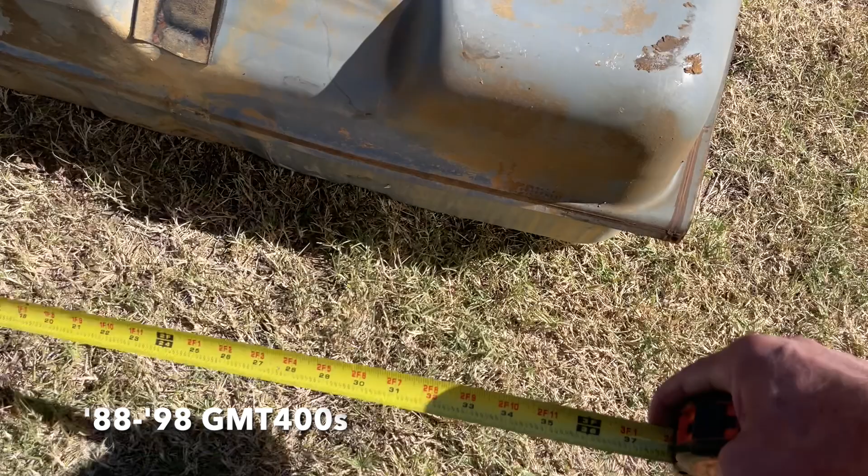So thanks for watching. Here's a fun fact for you: if your fuel tank measures about 48 and a half inches here, it's a 25-gallon tank. If it measures out to 60 inches, you've got yourself a 34-gallon tank.

It has been 2 whole days since we dropped that transmission off at Wayne's shop. There are some vendors that can't put a t-shirt in a bag and put it in the mail in the amount of time that Wayne can overhaul a transmission. I've always heard with goods and services you can pick 2 out of good, fast, and cheap. As we've established, the transmission was certainly done fast, but according to this invoice, it was not done cheap.

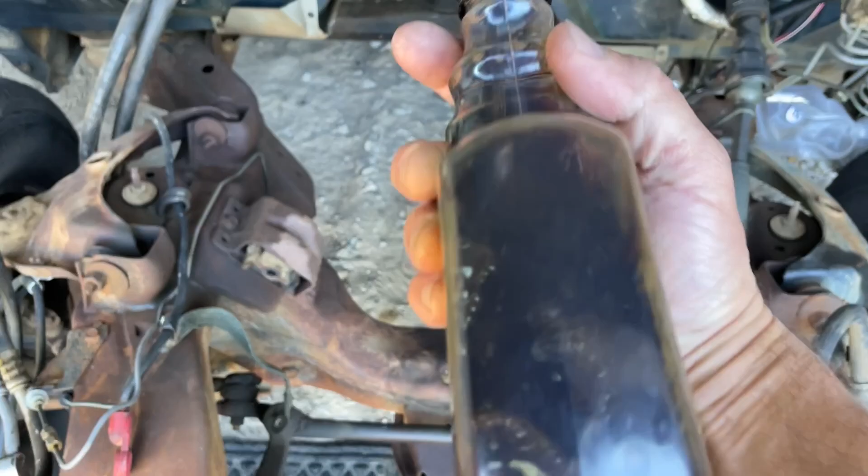Before we load this thing and take it to the car wash, I'm gonna hose it down with this B52 stuff. I found it at the local parts store. You can buy it in a gallon and in this spray. It's what I degreased that engine with, and it worked really, really well. This video is not sponsored by B52, but it could be.

I'll tell you right now, a winch with a trailer on it is so freaking clutch. You know what I'm talking about.

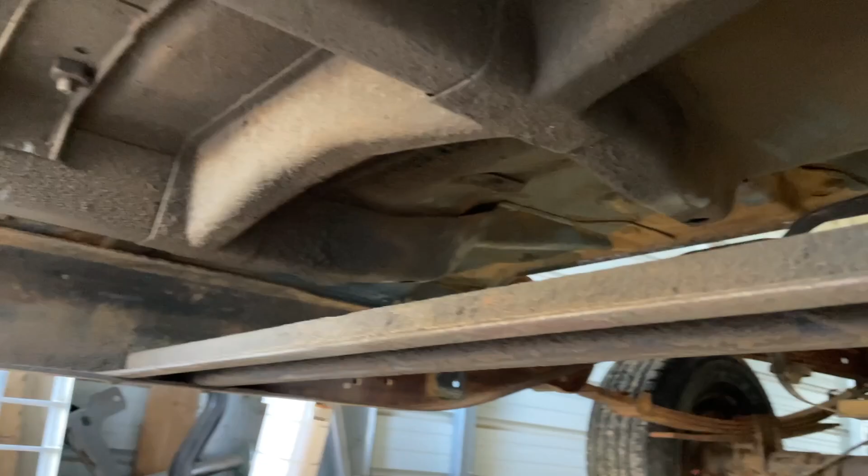Man, I'll tell you what, my poor little sandblaster would not touch this goop under this body of this cab. I don't know if the sand I've got in there is too coarse, or I just don't have the air compressor for it, or exactly what. It did kind of help with some of this sheet metal, like the stamped steel engine mounts - it would cut that stuff off a little bit, but it would eat an entire tank of air trying to get that done. So for the bottom side, since that's like 35 years of goop built up, just hear me out,

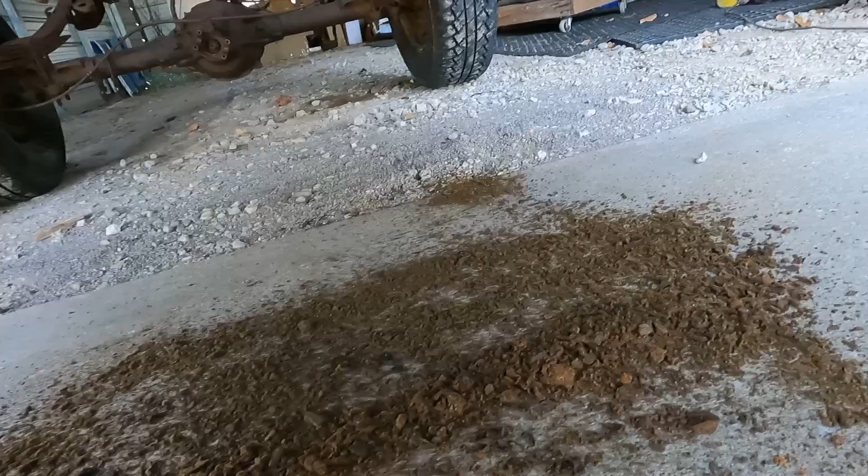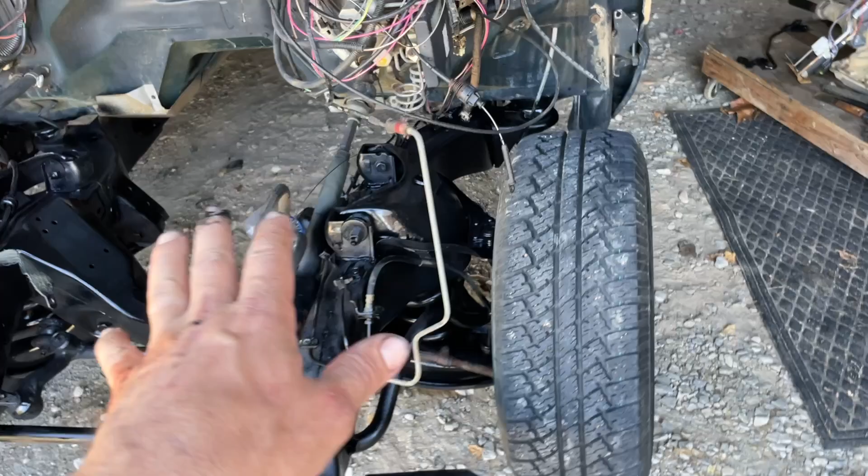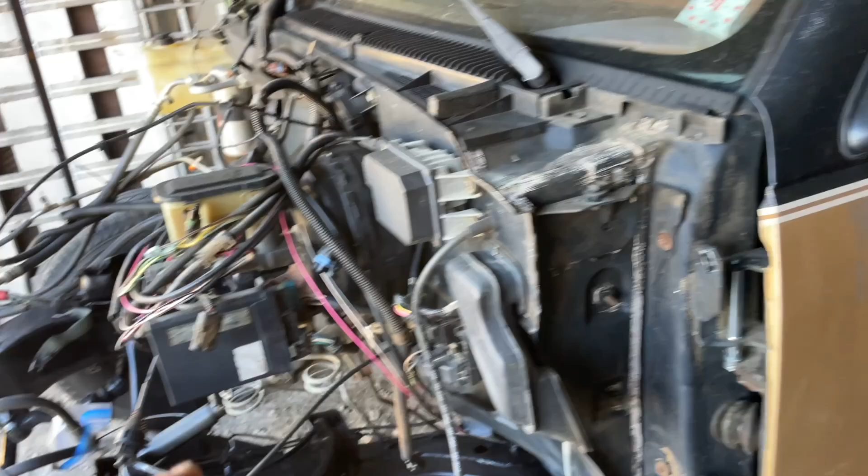All right, I'm going to admit this isn't exactly some of my best work, but I've really enjoyed working on this truck with the intention of it being a driver, and it's going to be mine forever, so I don't have to worry about anyone picking it apart if they're buying it. Normally if I build one to sell, I want to strip it all the way down, do a really good job, and make it super nice. Whereas this one, you know what? It's good enough. Mechanically, it's going to be rock solid, but some of this cosmetic stuff I don't mind so much. I don't want to be scared to put this thing on the highway, drive to Houston, to Lone Star Throwdown, or drive to Nashville for C10 Nationals, or make the trip to Utah for C10 Nationals one year. Wouldn't bother me a bit.

Frame prep work is done, at least for the front end and under the cab. We'll deal with this section back here later.

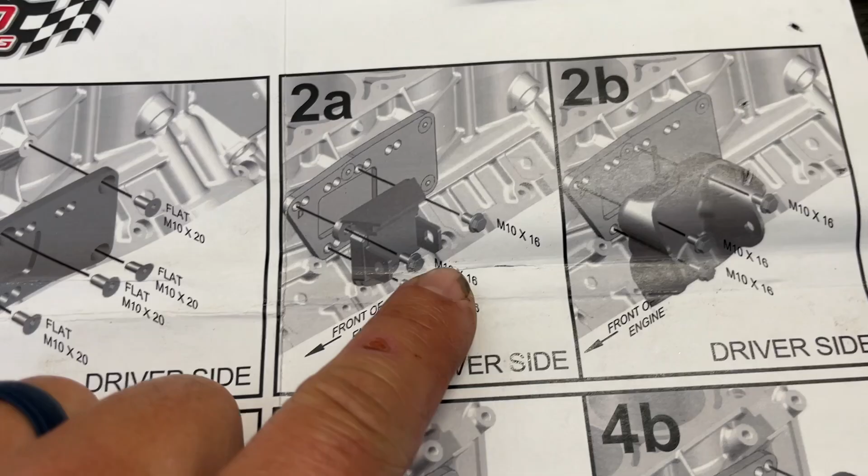So I thought we were ready to get started on the motor mounts, which, by the way, I bought all this stuff from 918 Motorsports locally. This is the Speed Engineering part number - these plates bolt to your LS, and then they allow for your small block Chevy mounts to bolt to them. As you can see, that's the clamshell style, which we have.

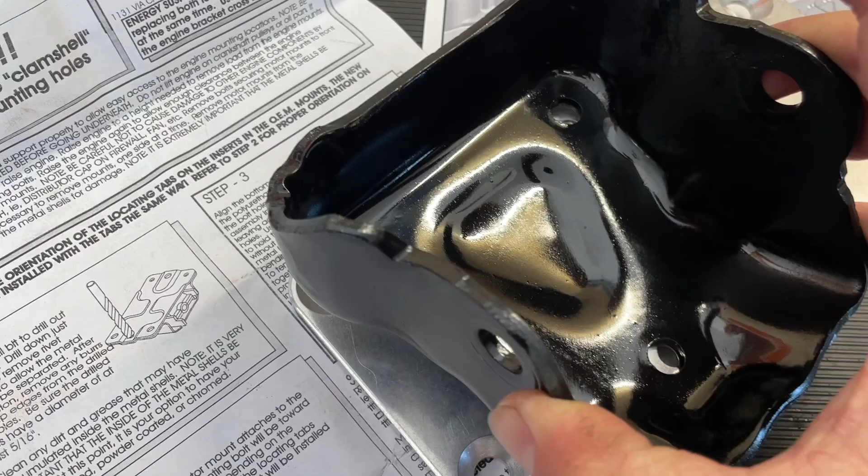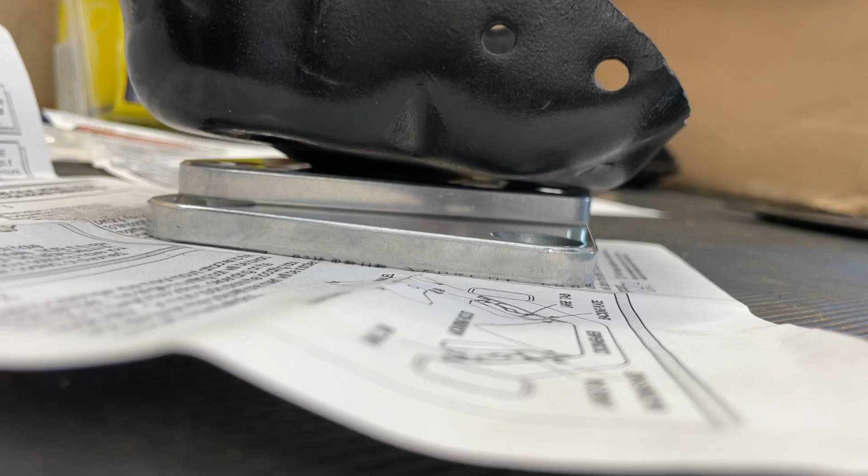The problem is I don't see an indentation there in that drawing, and you see this exists in my brackets. So I thought this relief would allow for those to sit in there. They're supposed to mount right there according to the instructions. Should sit about like so.

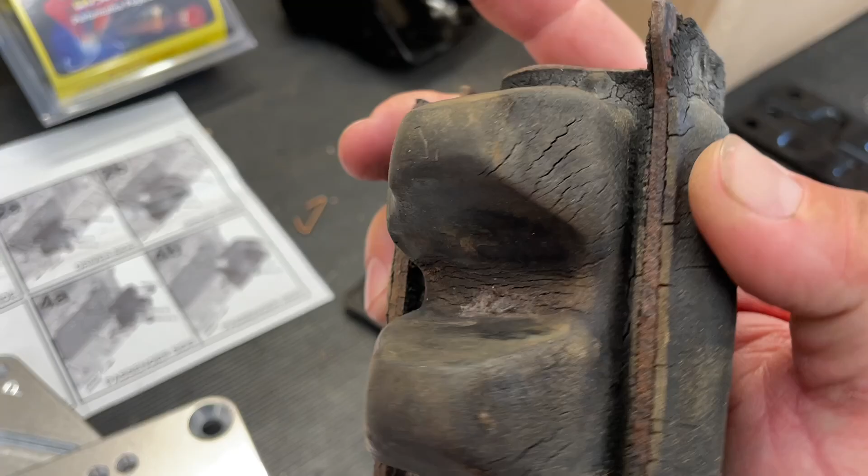But when it does that, it doesn't rest flush in the recess. Clamshell - these are just factory replacement small block Chevy urethane inserts that look like this. So yeah, they will sit in here where these used to, which are not in the best potential shape they've ever been in. And then it takes some doing to mash these down together and then bolt them to the frame.

In the meantime, we never did put the crank pulley back on our engine after we tore it down and put new gaskets and seals in it and cleaned it up pretty good. You guys remember when we tore the engine down in a video, we cleaned this up and painted it. So I'm gonna put that on. A lot of guys will use or reuse one of their factory crank bolts, which are non-reusable, but I guess it seems like I got a pile of these things in here.

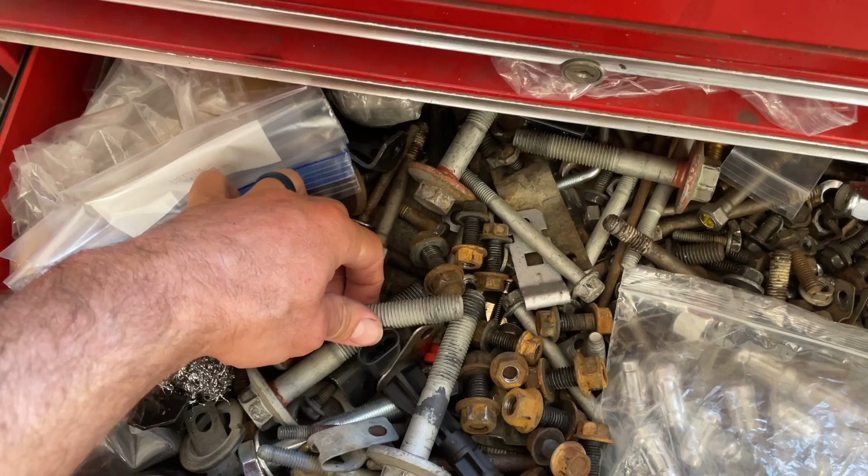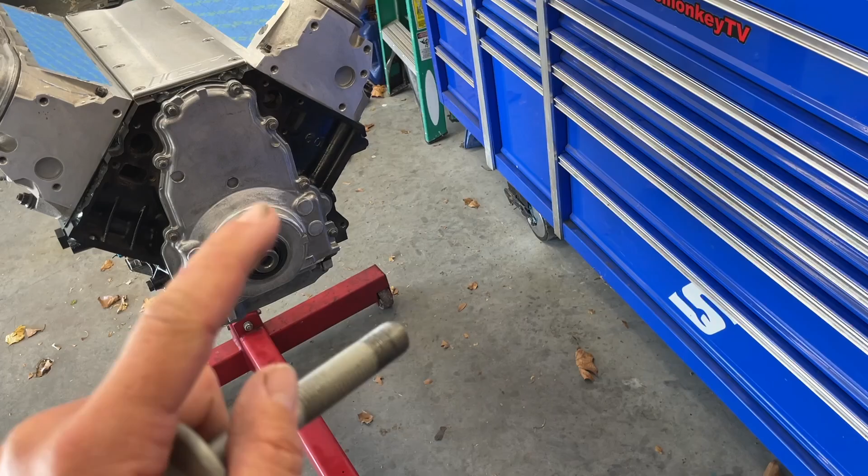Yeah, just pick one. Maybe put a little grease right there so that rubber won't change the torque, and just run that thing in with one of these old bolts, then buy a new bolt to torque it down properly, because they are one-time use torque-to-yield bolts unless you buy an ARP.

Again, from 918 Motorsports, I think this was $12 or $14 or something like that. Back when the LS motor was kind of new, we couldn't find installers that worked with this engine, but since they've been around so long now, it's not uncommon to find tool rentals available. Your local parts store probably will have something you can loan, or you can order one on Amazon because they're not that expensive.

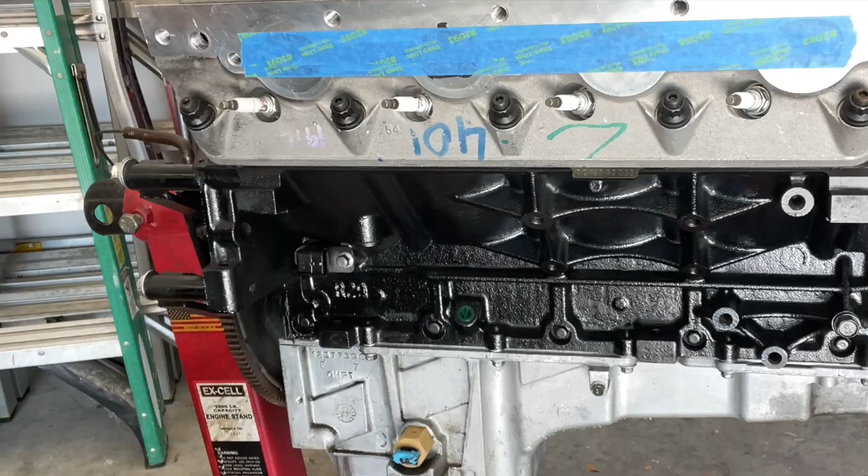Something you'll need that you won't find on Amazon is this little homemade jobby that my homeboy Doug made. Basically it's a piece of flex plate and some tubing, so you can bolt it right up against your flex plate and tighten it down. It'll keep the engine from turning when you're tightening that crank pulley.

Don't use an impact for this, kids.

Now we've got the pulley all the way flush against, I guess it'd be the oil pump in there. This is our new bolt, GM part number this. Again, you can use an ARP bolt if you like. To torque that thing, you're gonna need a torque wrench that's good up to 250 pounds. It's also helpful if you're strong as an acre of garlic, so you can get it there.

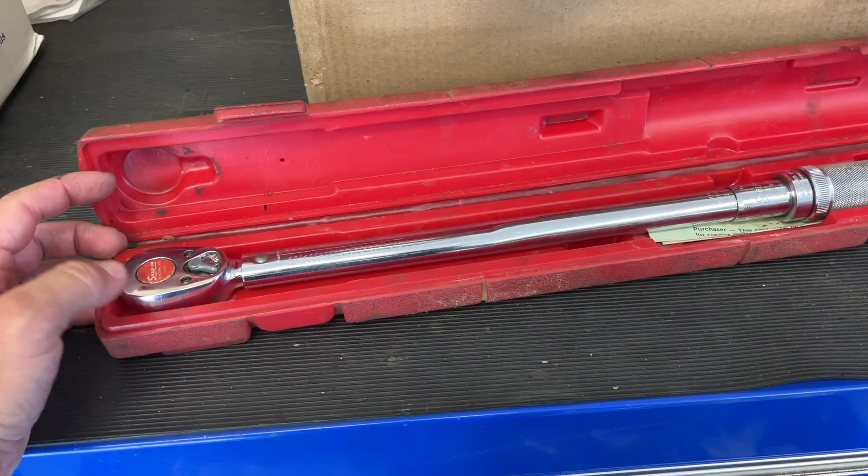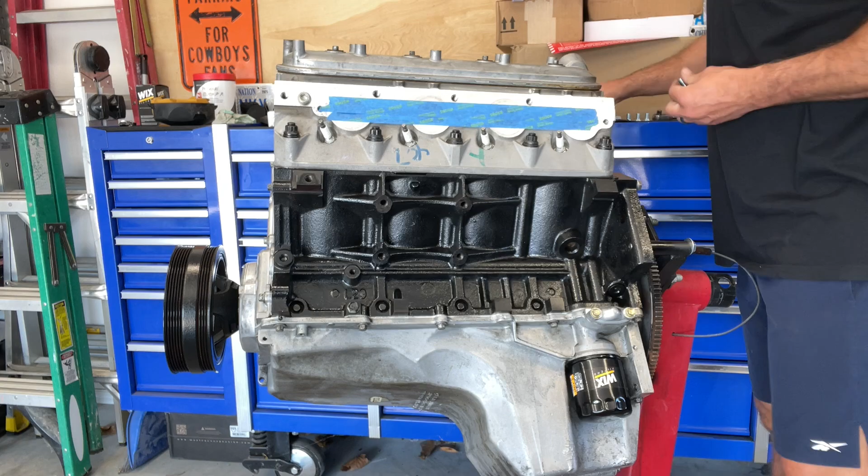All right, we're waiting for the paint to dry on those recently modified upper mounts, or cups, as some like to call them. So I'm gonna go ahead and put this adapter plate, and I like to use a little bit of thread locker. This is orange, which is supposed to be somewhere between blue and red. The blue probably be good use for this, but I can't imagine when these are going to need to come off.

Instructions don't really list it, but based on some of the things I've seen from like ICT Billet, it looks like the factory location is all the way forward on these mounts. So that's where we're going to put ours, our recently modified ones, that is. And I put blue thread locker on these.

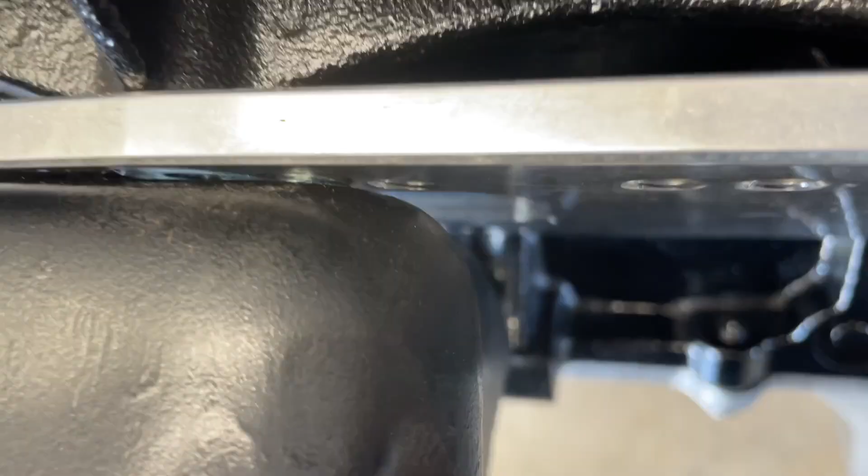Is it being aluminum? I don't want to get aggressive. And just our luck, this bolt is bottoming out on the engine block before this cup gets tight against our engine mount.

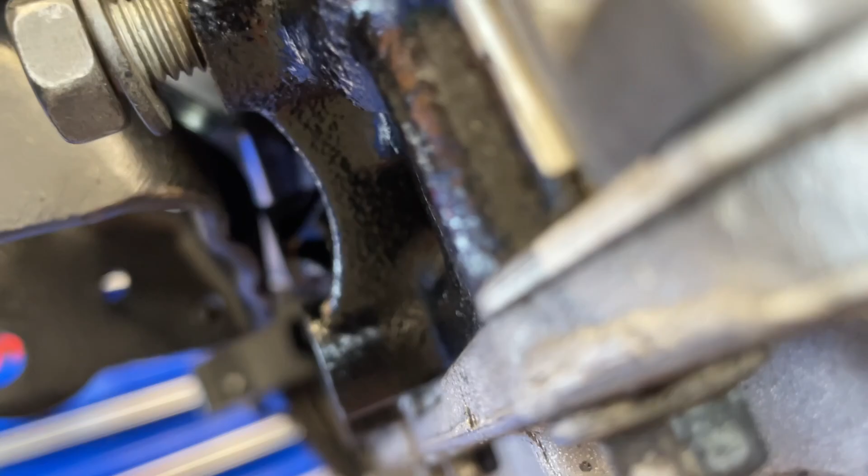Like, has nobody ever tested this kit? The issue for the passenger side is that little bung on the block for where the AC compressor mounts is making contact with our bucket here before it gets flush. So more cutting and modifying.

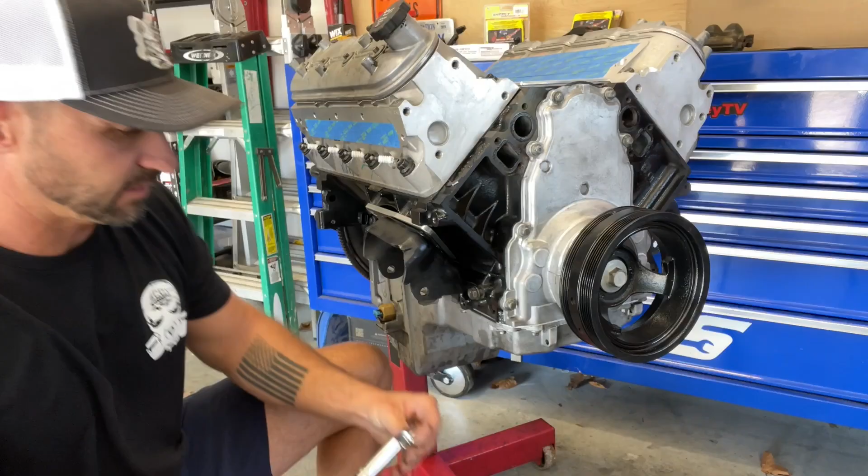After using washers on both upper rear bolts, both sides, to space it out, modifying our lower engine mount cups to get rid of that hump in them, and trimming this AC gusset on the block to clear these engine mounts, these pretty much just bolt right on.

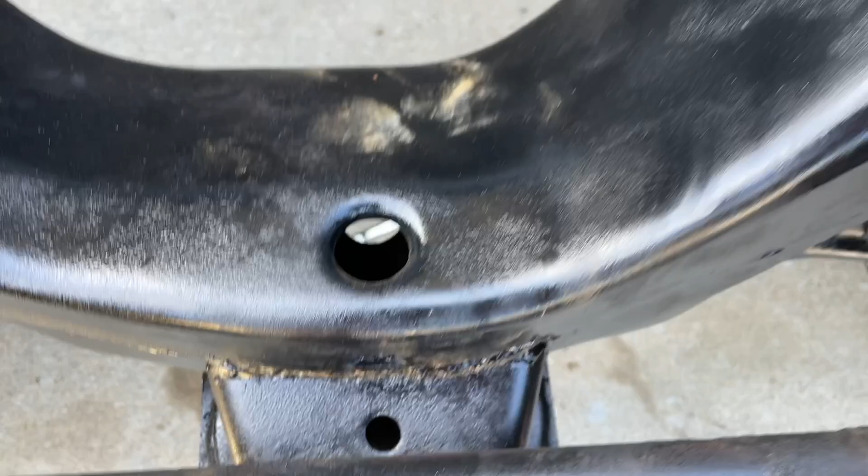If there's a worst engineering design in history, I think this would be a contender that General Motors has accomplished here. The bolts go through this, the mounts, into this factory K-member, which outside of holes like this size and that one down below, you don't have access to the nuts on the backside of these bolts unless you disassemble the suspension and pull the coil and the shock out, then reach into a smaller opening to get to them. So yeah, you got to use the buddy system on this one.

We finally reached the stage where we can pull the OBS into the main garage and start doing some of the serious technical work. Let's go over a couple of the parts that we're going to need.

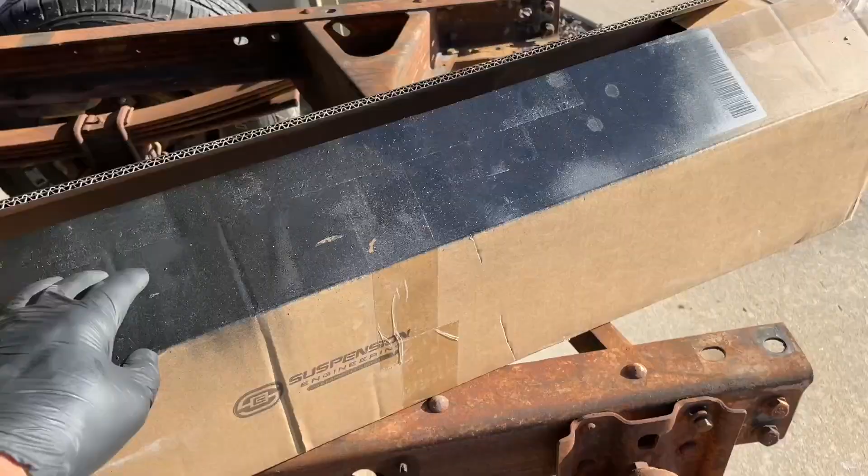This is from Speed Engineering, bought through 918 Motorsports, from their suspension division, which they conveniently call Suspension Engineering. It is their OBS transmission crossmember, and it's designed to work with their exhaust, which we have as well. Their X-pipe for these comes with this hardware. Oh, here's the part numbers - top part number is the shims and the bottom part number is the crossmember.

So I think you can get this in red or black. Their website states that you're going to need 3 of these shims to get the transmission lined up for their exhaust system, if not mistaken. And this is the hardware they send to mount the crossmember in the frame.

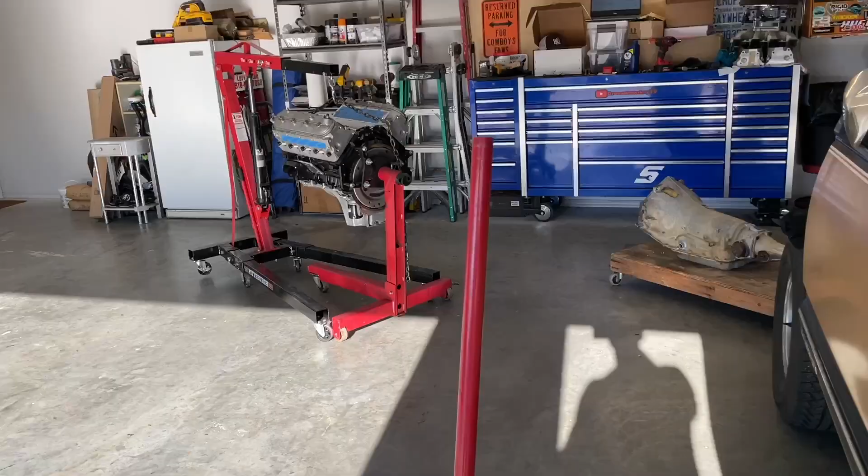We've got the engine ready with the hoist. The transmission, of course, is sitting here as well. We got a couple little things we need to do to that. This is the torque converter we're going with on this build. It's from Performance Torque Converters.

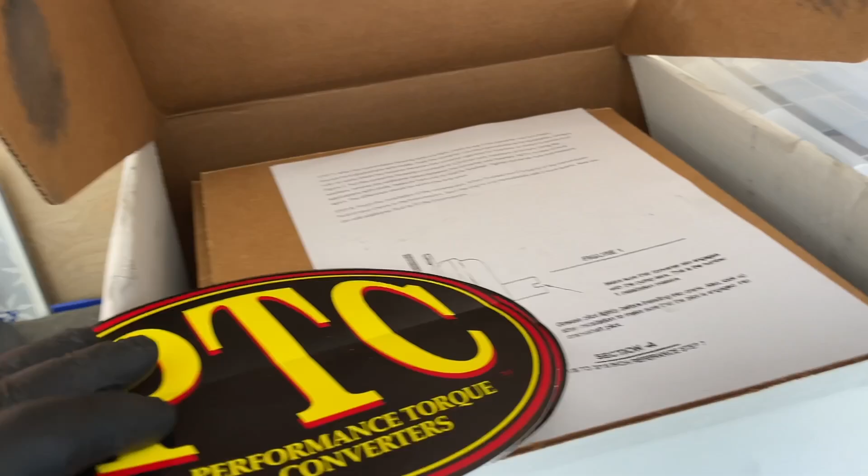I guess some of these guys used to work for TCI or something like that. I called them up, told them what the truck weighed, the cam specs, and what we were trying to accomplish with this build. They built this in like 2 or 3 days and shipped it out to us.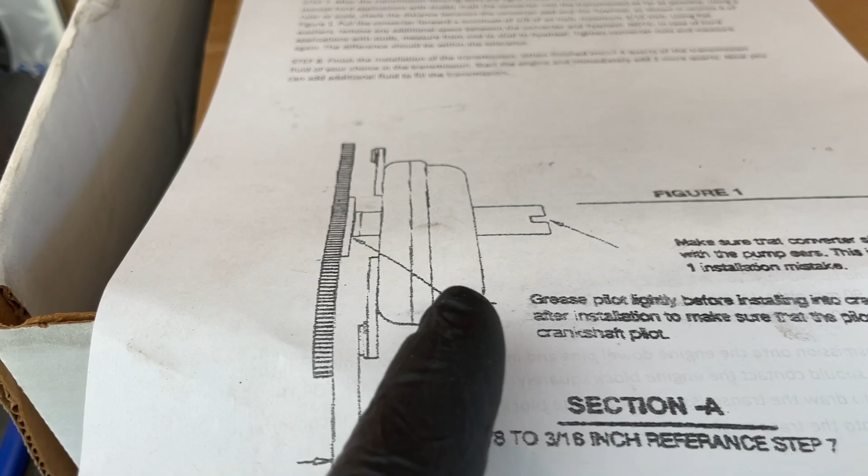There's our instructions about putting fluid in it and test fitting everything, and here's a statement about how your torque converter should be 1/8 to 3/16 away from the pump, in this direction. So you add shims between the flex plate and the torque converter to accomplish that distance, which we've done before on the channel, and we'll look into that when we go to mount this thing.

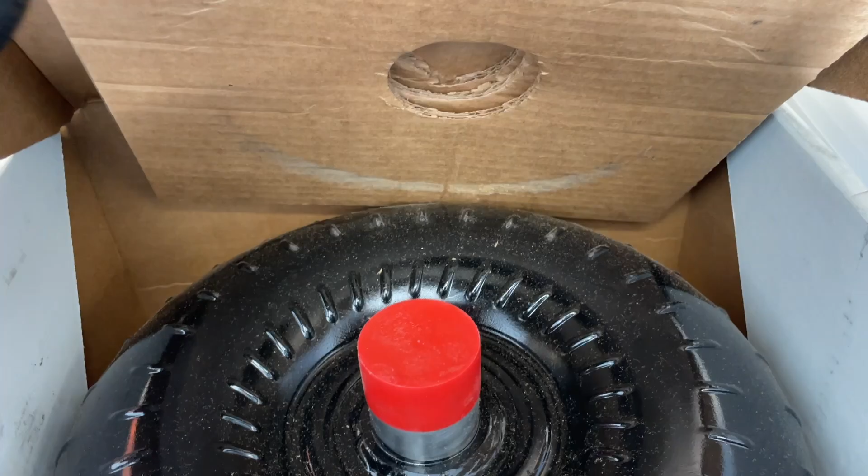Some flex plates must have smaller holes. It was sent pretty nicely packaged, and actually sent with torque converter bolts—well, two of them anyway. Oh yep, there's the third. A lot of manufacturers sell you those bolts separately, and at the price of this torque converter I was extremely happy. I don't think they gave me any kind of special deal, but it's like $300 or so plus shipping. So we'll see what happens.

I mean, it's a lockup. 2200 to 2500 stall, I think, would be just right for our application.

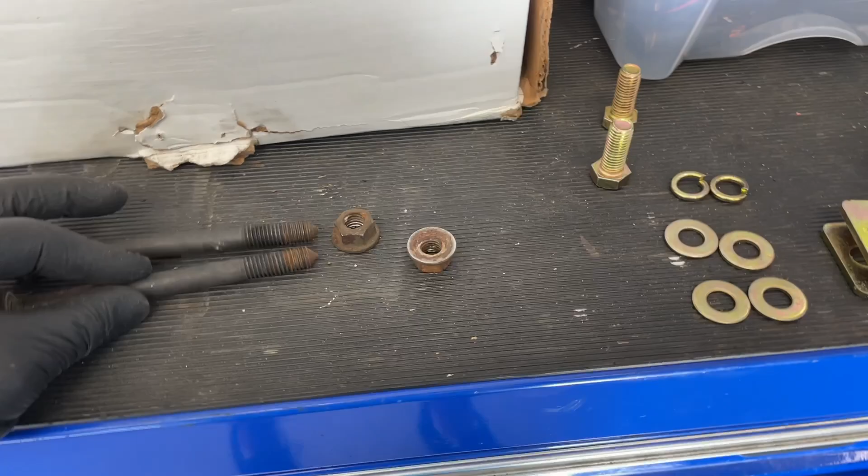When you're doing these projects by yourself, you want to make sure you have your hardware ready. Here's our engine mount bolts. These are the bolts that came with this transmission mount, also from Speed Engineering or Suspension Engineering.

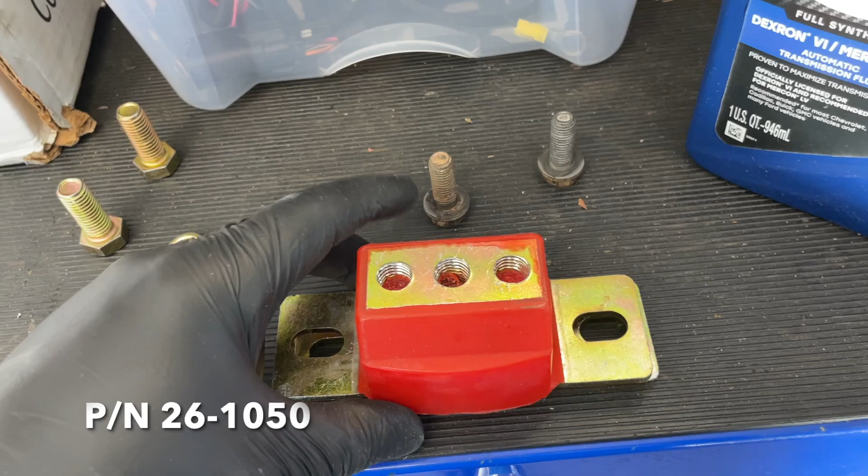It depends on which website they're calling themselves when they sell it. It comes with these washers and split lock washers, and the bolts go through the transmission cross member and through however many shims—though I don't think that's going to be long enough to go through all those shims. We'll see what happens.

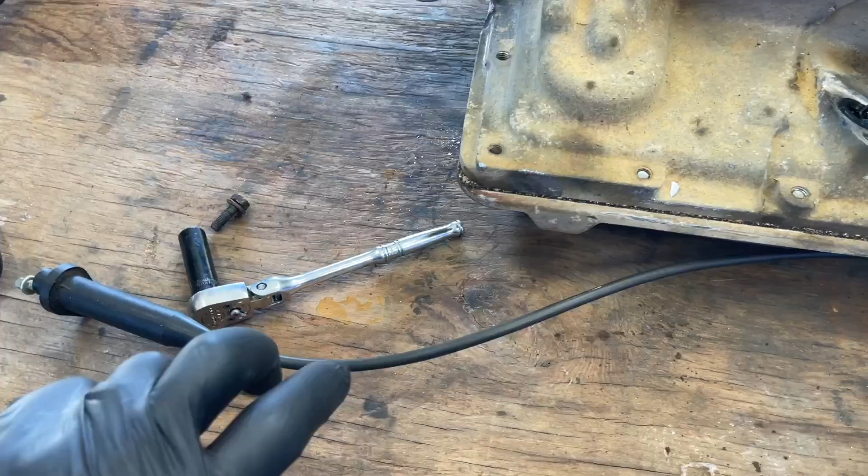I've got this set out and ready. This is our TV cable, so this is what tells the transmission when to shift based on throttle position. It's easier to go ahead and get that threaded into that little wire and bolted down out here before we have it inside the truck.

I'll probably leave out the dipstick tube for now because those things tend to get in the way when you're fighting your way into the motor, into the truck.

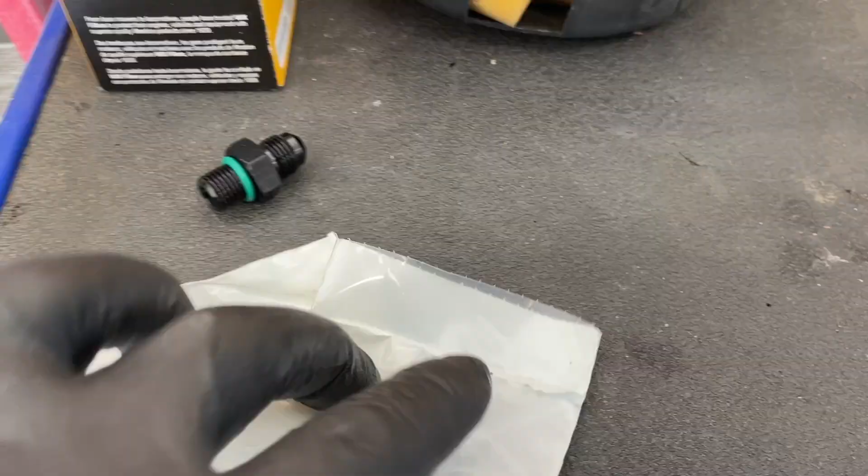These are our transmission cooler lines. What we typically get from Amazon, ICT Billet, or 918 Motorsports are O-ring fittings that adapt to— oops, wrong drawer. Yeah, here we go. I knew I had a bunch of them. There's the part number from ICT Billet.

Again, there are multiple sources you can get these from, and they'll thread into the 4L60, 4L60E, 700R4, and probably the 200R4. These are not metric, by the way—11/16. But these are 19 millimeter.

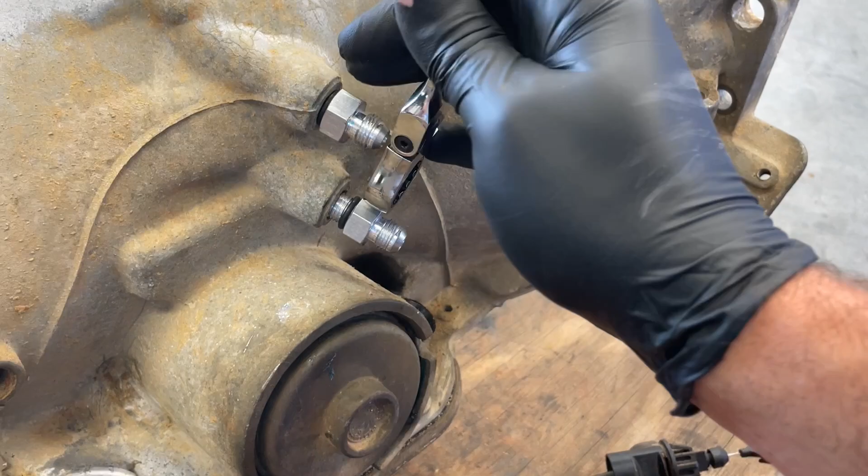You don't need these things tightened like lug nuts. It's O-ringed, so you really just need to run it in there until you compress the O-ring. And you'll notice there's a bevel there that O-ring will kind of sit in.

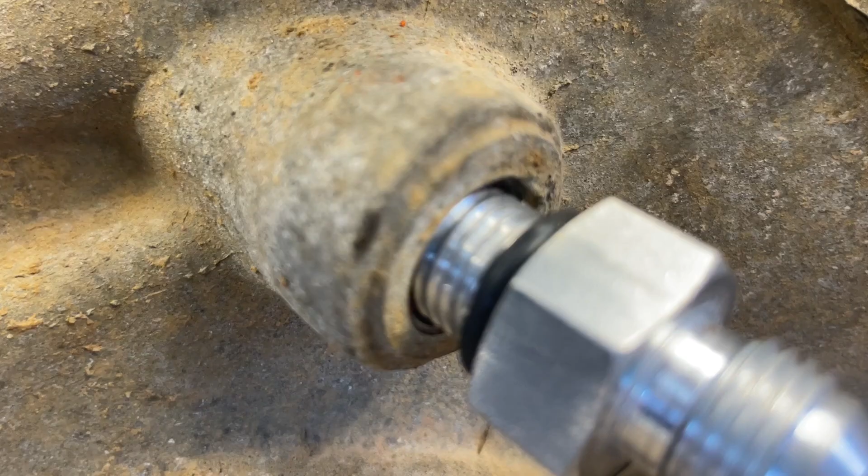Here's your pro tip for this video, and it goes for all the hardware: as you saw, we kind of had it ready. Have your hardware laid out and ready where you're gonna need it, especially when you're doing it by yourself. It'll save you a bunch of crawling in and out.

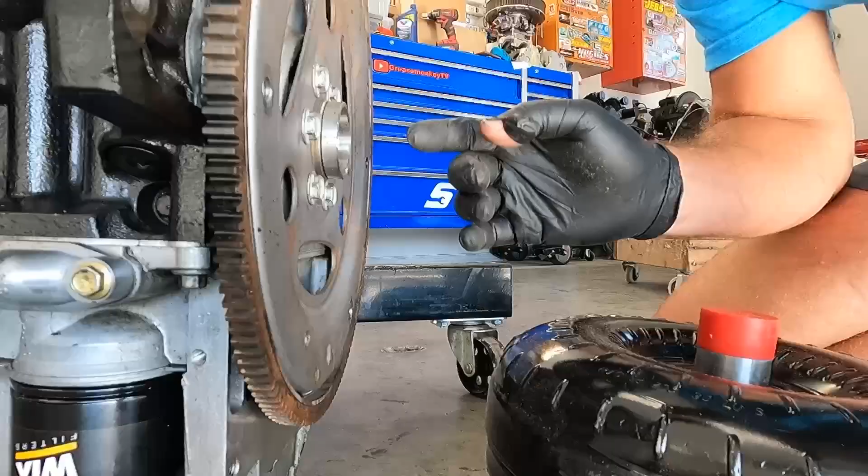When you're doing an LS swap and reusing one of the older style transmissions that did not come behind an LS generation engine, you have to have a specific flex plate like this one, and this little spacer tube. I think it has to do with the distance of the bell housing you're trying to make up here. You want to make sure this is cleaned up.

According to the instructions from PTC, this is also in there. This is cleaned up, a little bit of grease or something on it, and then check on your torque converter that there's no excessive paint or something you need to clean off, because it needs to sit in that spacer bushing, and you should be able to slide it flush up against the flex plate.

So when you're test fitting to get your distance right off of the transmission pump, you don't want that to be when you find out you've got a lot of trouble.

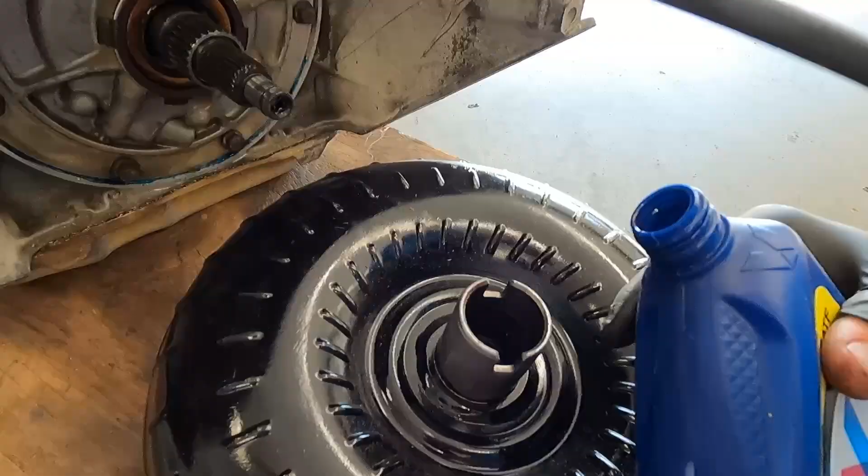Put about a quart of transmission fluid, or however much you can get, in your torque converter and slide it onto the transmission. You can really take your time doing this—these things take that transmission fluid really slowly.

And then sometimes you can turn them up—you can sort of see it start taking it in there a little easier. Then let it rest and keep an eye on it. Come back later and add a little bit more.

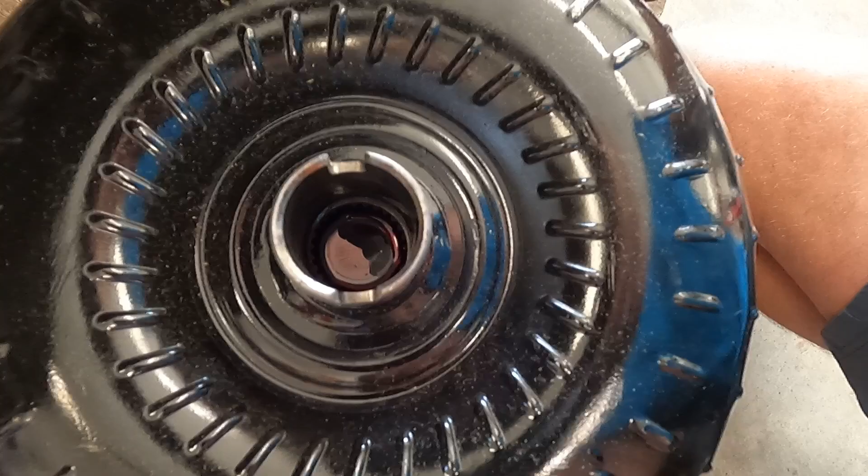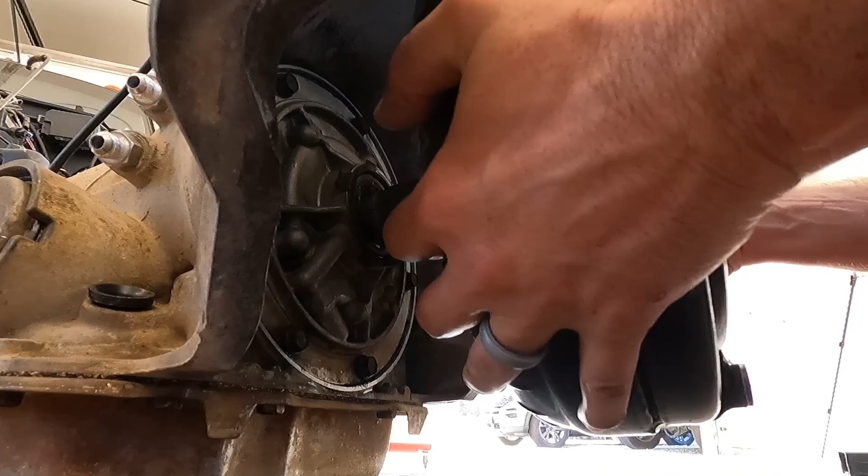All right, I put a little transmission fluid on everything. They say you can put grease on this too, but whatever, dude. I'm going to be real careful and support the weight of your torque converter so it's not resting against that O-ring seal till it gets up on some splines.

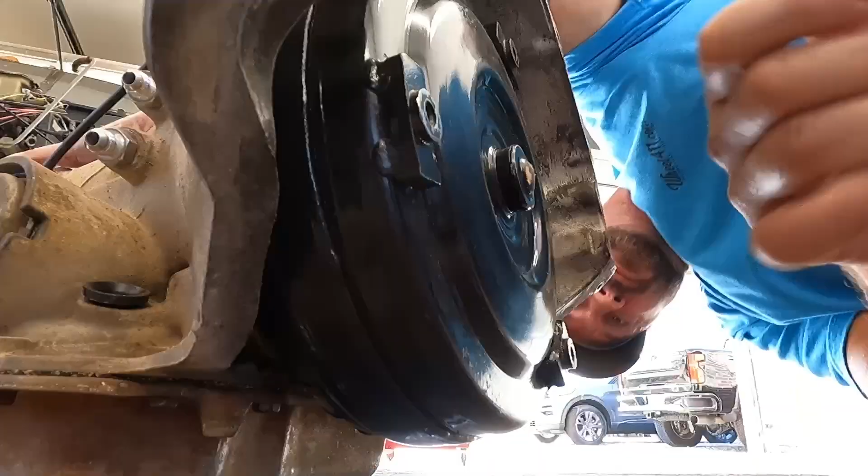Oh, somehow we still managed to pour a little bit out.

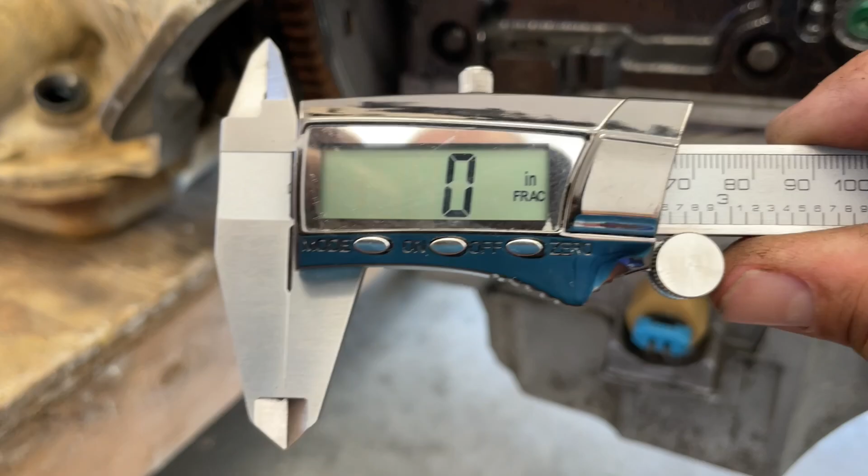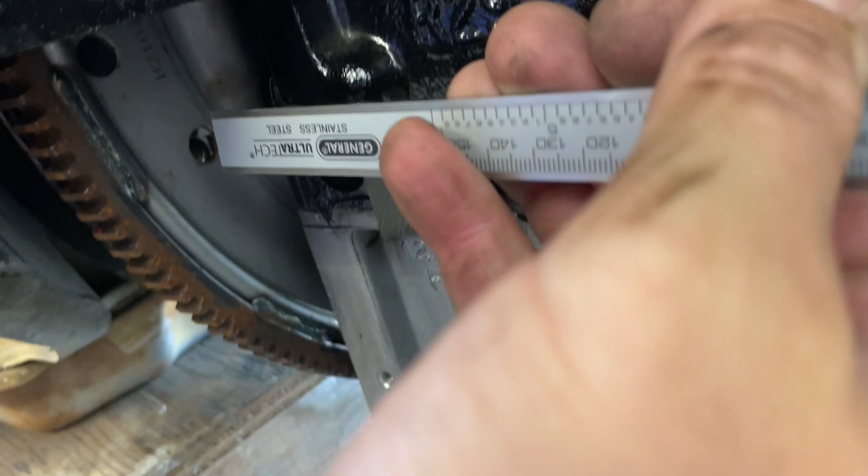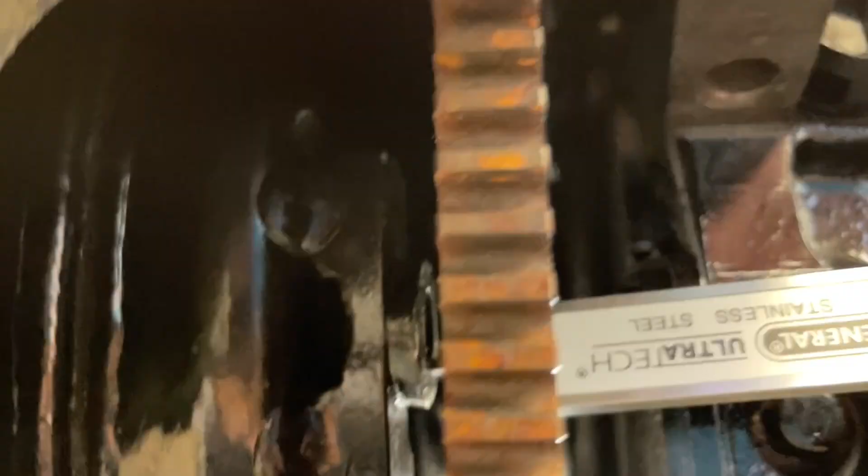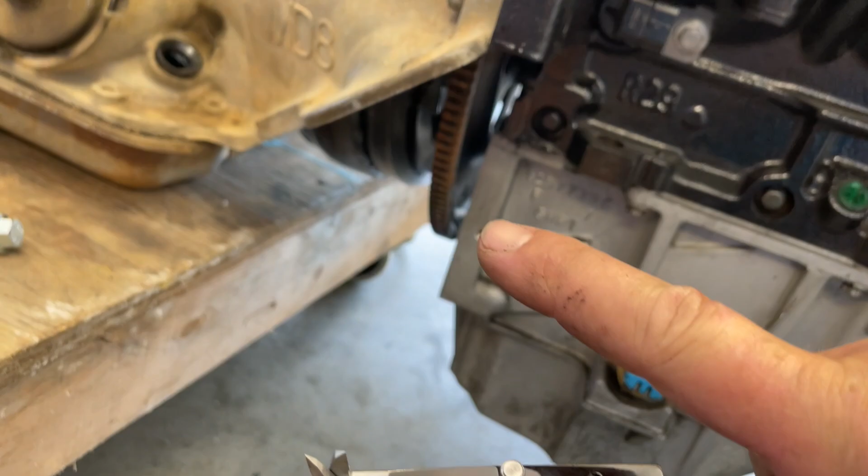It's time to do the maths. So we have our calipers set at fractions of an inch. Almost all calipers, if you open them this way, give you a reading that comes out the bottom, which is another method of measuring. I'll put the calipers against the flex plate, then extend the tab out until it makes contact with the surface of the mounting tab. So that's touching this surface, and this is touching the surface of the flex plate. It tells me we have 3/8 of an inch whenever the torque converter is all the way against the face of the transmission pump.

Now we're looking for 1/8 to 3/16. This needs to move out at least 1/8, and that will give us the maximum amount of space from the pump, but the minimum amount of washers taking up thread on our torque converter bolts.

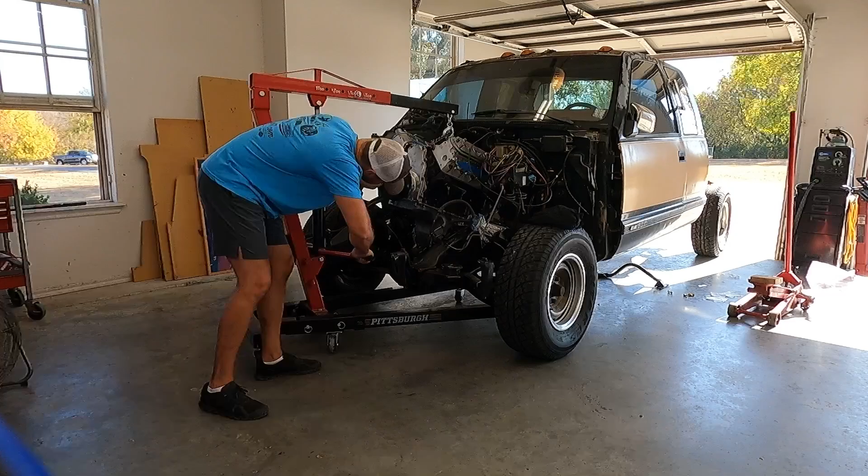Makes sense on the instructions now why they want you to put this small tab towards the top and the big one towards the bottom. I don't know if we mentioned it earlier, but the idea is this will rest on these tabs and the bolt will slide in real easy.

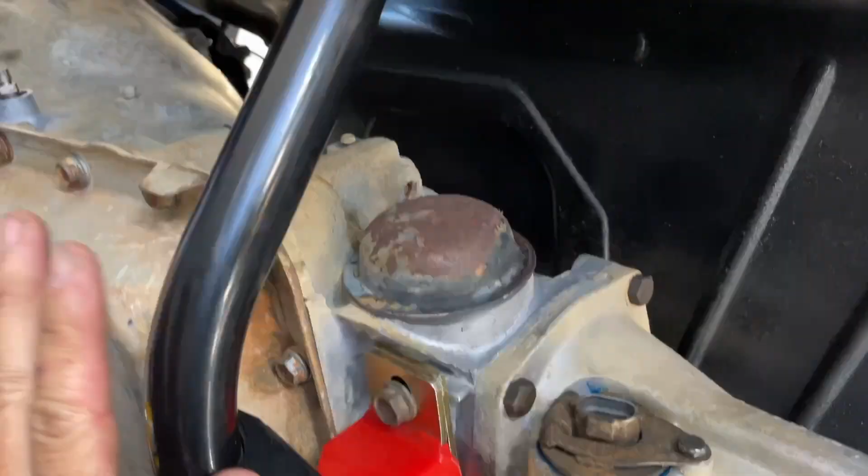This transmission cross member has no instructions. I saw pictures on their website under their exhaust system, not under the cross member, and noticed it. Of course, the arches go up, but this one makes contact with the pan before it gets far enough forward to bolt this, to run bolts in the mount.

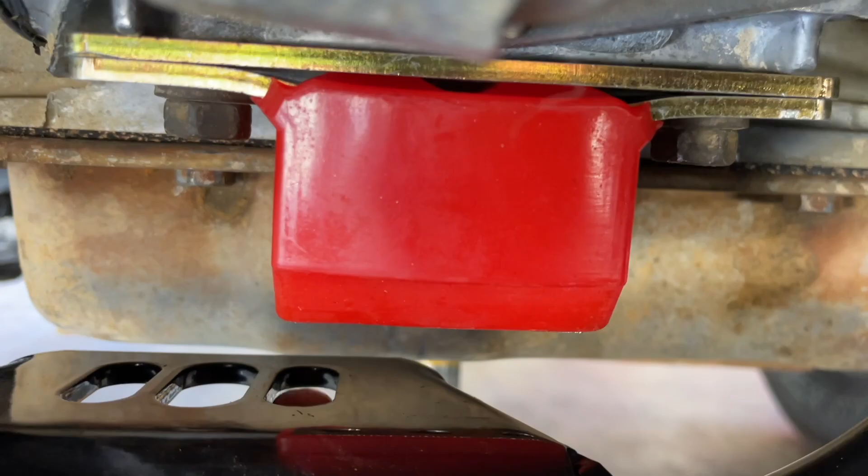When you flip these way off center, this bolt could probably line up here. I don't love the idea that only one bolt will be in that transmission to the cross member, but in all actuality, that's all that was on these from the factory.

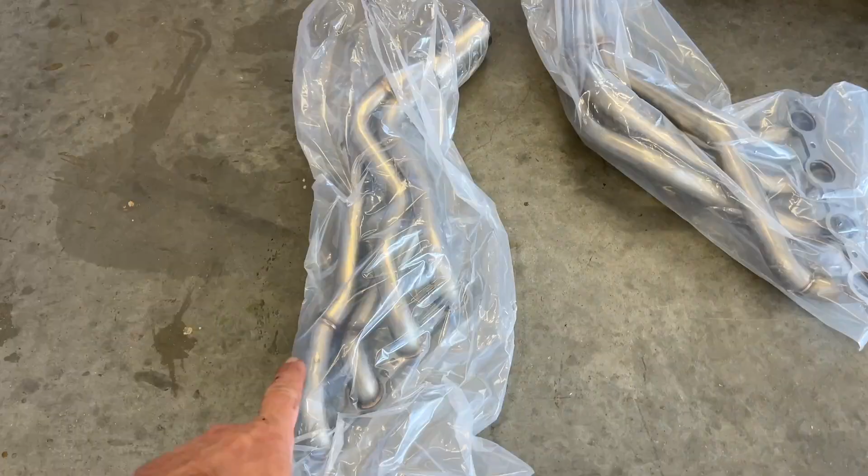These are the 1 7/8 inch stainless headers from Speed Engineering. Get a couple of these bolts ready. I'm just gonna test fit these headers on here without gaskets for now.

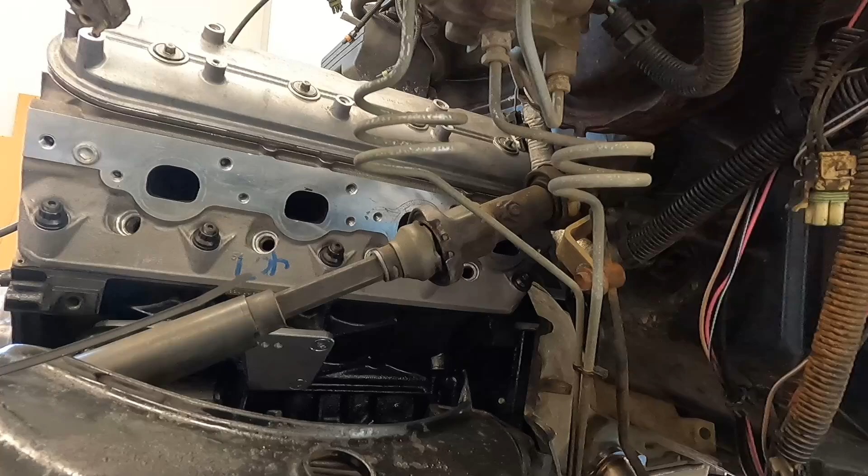And bring any bolts with me.

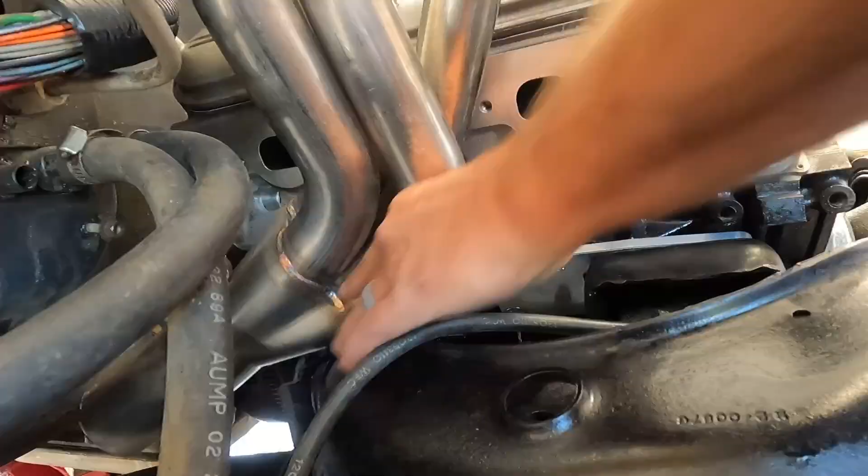I'll take the air conditioner off and fit it in there. But it looks like I'll probably end up having to cut that tab off the side of the transmission.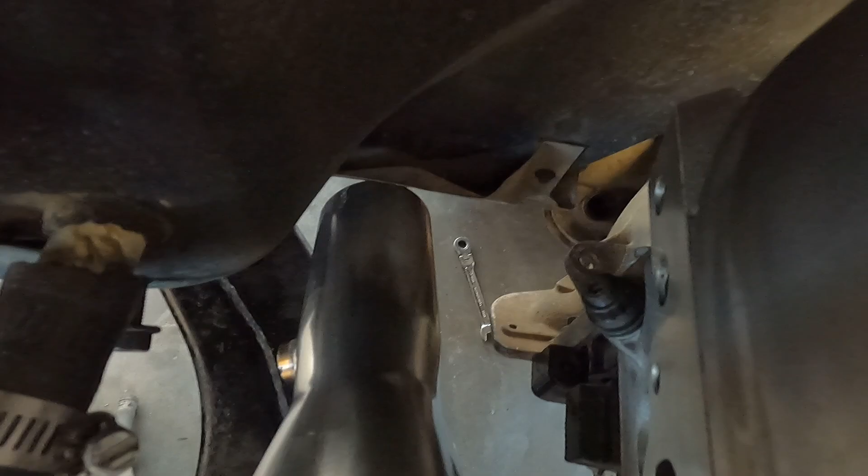This would have been way easier to cut off that transmission while I had it out here on the floor.

Stay there, buddy. Looks like the transmission's gonna have to come down in the back, maybe for this to flush up just right.

Man, it is a tight fit, which they did state that on the website.

So it's gapped at the top, which means the bottom needs to swing out, but it's making contact right here with this upper control arm mount. I'm not sure going down is going to help much.

I certainly don't like how close this brake line is. I'm going to have to massage that thing a little bit.

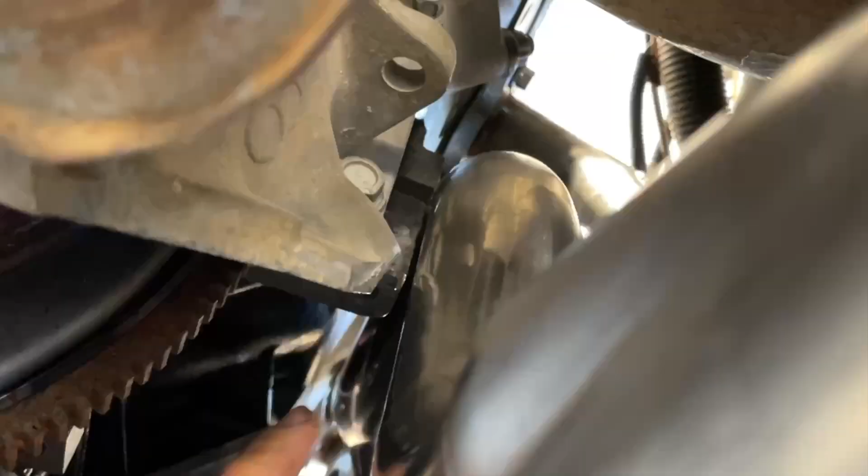There's no way these would have went in without trimming this transmission right here, because I took a full, I don't know, inch off of it for that ear.

The header is still, well, it wouldn't be touching the block if we could get it to swing out this way like it still needs to.

Here's what we ended up with for now. I've got 2 shims, and I ran the bolt in the middle hole of the mount and one hole to the right here. So technically the bolt's going right there. That should be fine. These look like we've got pretty good clearance coming back.

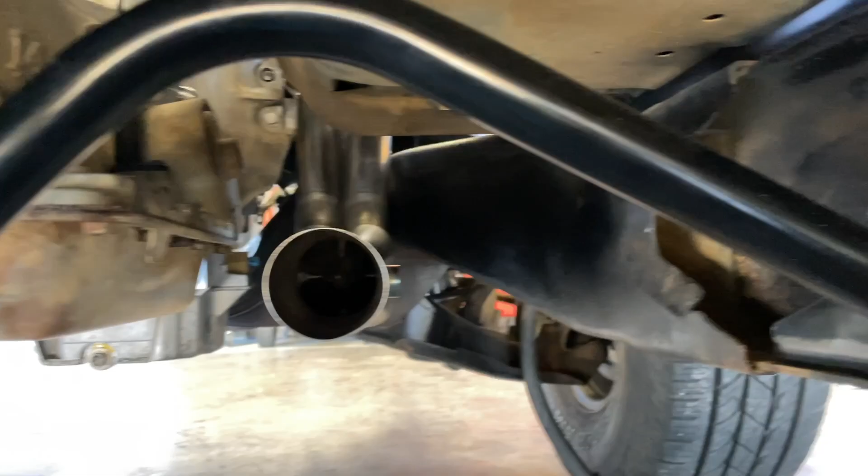I could see where it could stand to go maybe up one more shim based on the angle of these exhausts, but I still have that concern with this upper A-arm mount. If it raises up some, I don't guess it'll make a huge effect on this contact point. It's kind of hard to tell with the lighting and such.

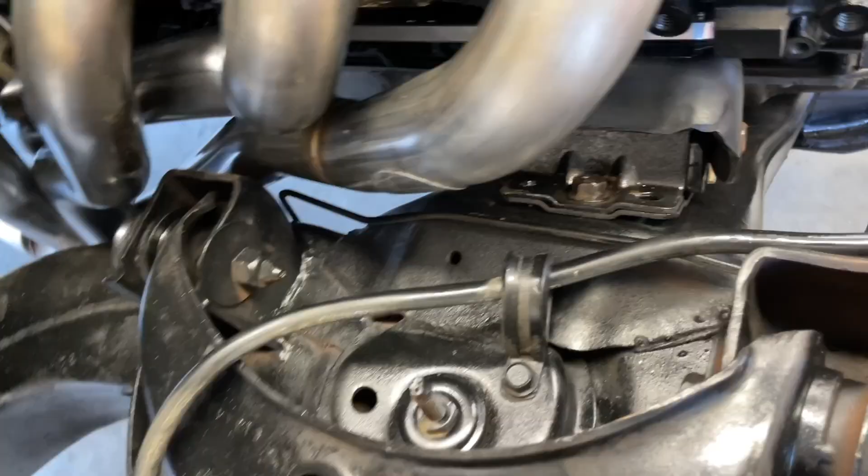If it still makes contact, raising it up is not gonna help that at all. Lowering it a bunch might help, but lowering it's not really an option. So more than likely we'll end up putting a little dent in this header, which is unfortunate because it's specific for this application. Maybe it sits a little wonky on the mounts, but really you need like a quarter inch in between there.

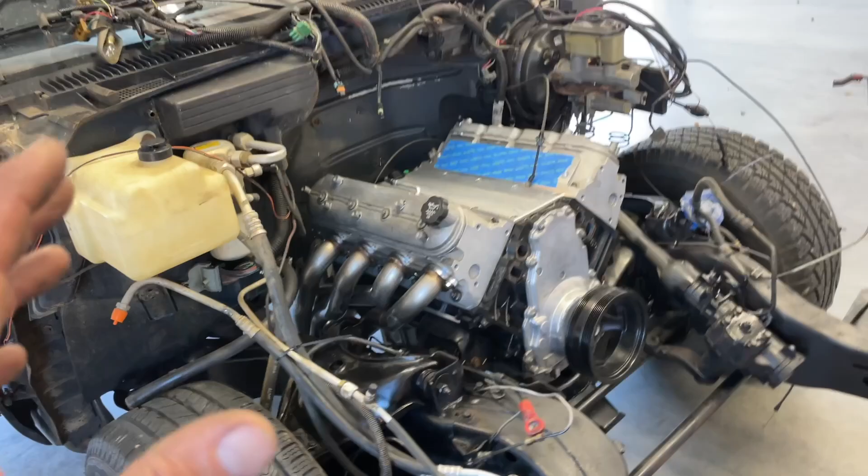Anyway, this is probably gonna do it for this video. I don't wanna just become any more frustrated about details like that.

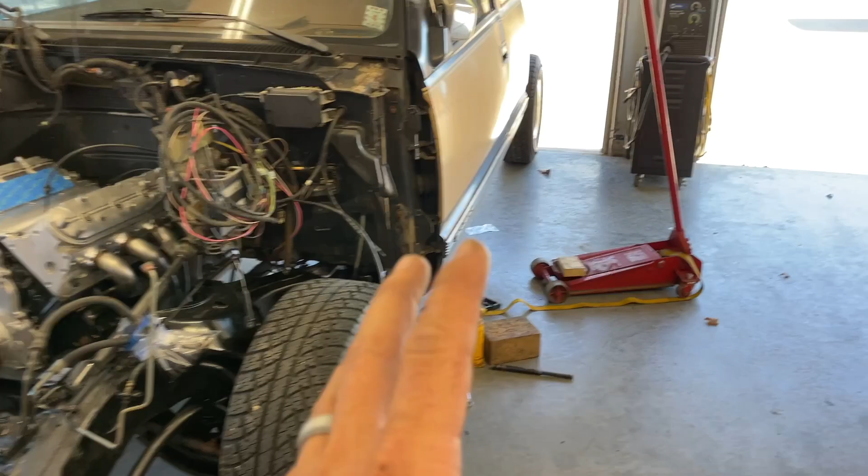The engine and transmission are in. We will work on the rest of it in the next video. Probably put that X pipe on it and do the fuel system because we've got all new stuff there, well, except the stock lines here. Anyway, you'll see it in the next video. We'll get it plumbed up and get this sucker running.